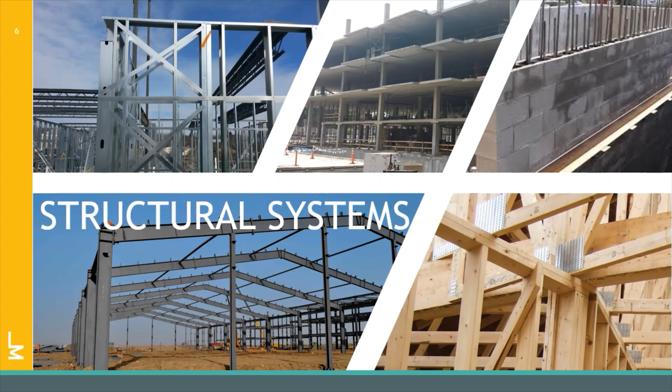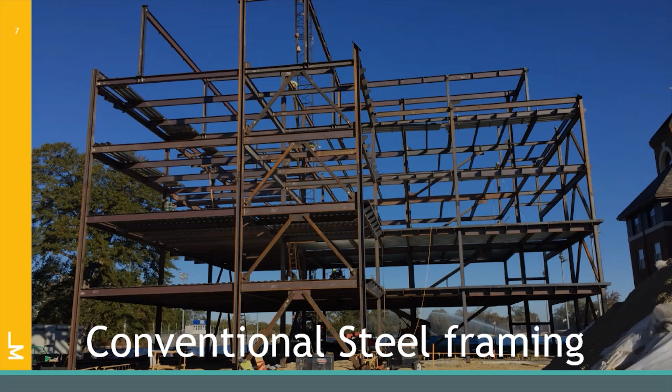We'll go through a couple here. The first construction type that we have here is conventional steel framing. This is definitely one of my favorites and one of the more common types of construction. A fun fact about steel is that it's the most recycled material on the planet, more than all other materials combined. Here we have a picture of what is called a pre-engineered metal building. It's pretty common for things like warehouses.

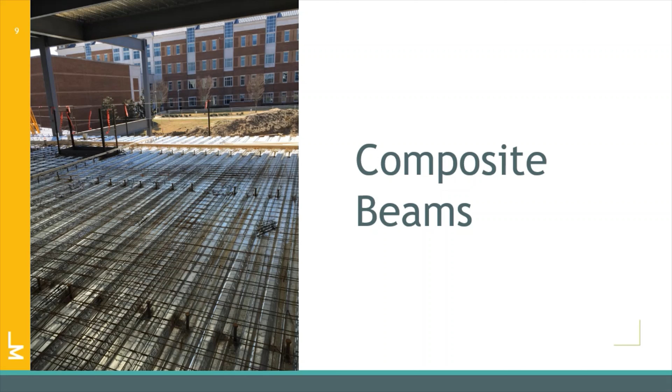Hey guys, I'm Brian, and this is Taylor. And we're with Lynch, Mykins Structural Engineers, and we want to talk to you guys a little bit tonight about what structural engineering is. So when we talk about structural engineering, we're talking about the forces in a building, right? And how do we, as designers, account for those forces? How do we create the building in such a way that that building can withstand all the forces safely and keep everybody inside safe while they're doing their thing?

So we have two types of forces that we work with primarily. One is gravity force, the other is lateral force. When we're talking about lateral force, we're talking about wind, tornadoes, earthquakes, anything that's going to make the building want to go side to side. One of the most important parts of the building, though, is the gravity load resisting system. That's the system that you can apply your body weight to, or furniture to, or any kind of loading in the building that's going to be supported directly by the framing members.

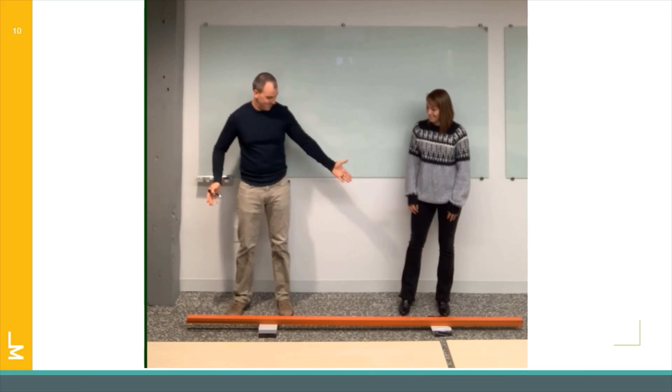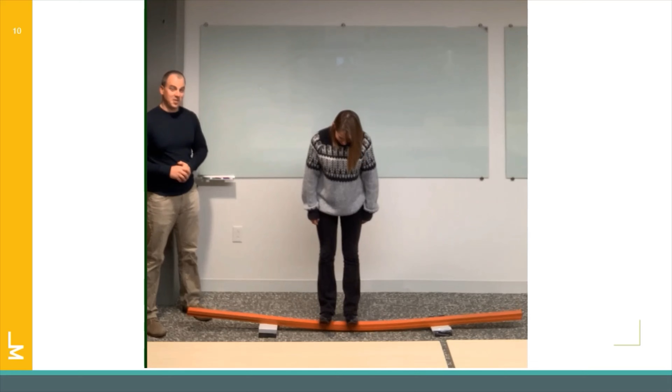So, to illustrate this tonight, we've got a beam on the floor, right? We look inside a building, most of the stuff inside a building can be reduced to beams. Whether you look at it to the left or the right, top or bottom, it's pretty much all behaving the same way. So Taylor is going to step on our beam. What do you guys see? You should see it sagging. You should see it bending like this, right? So what's going on in that beam?

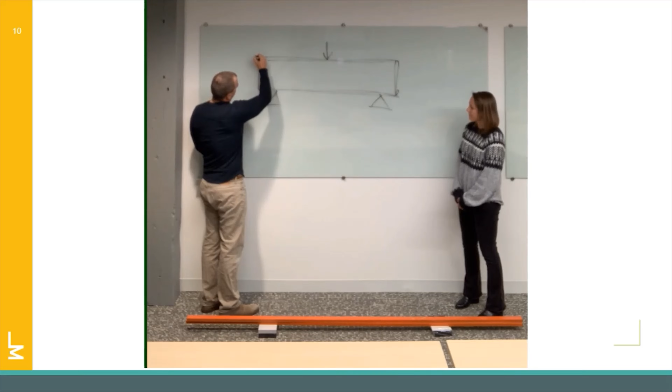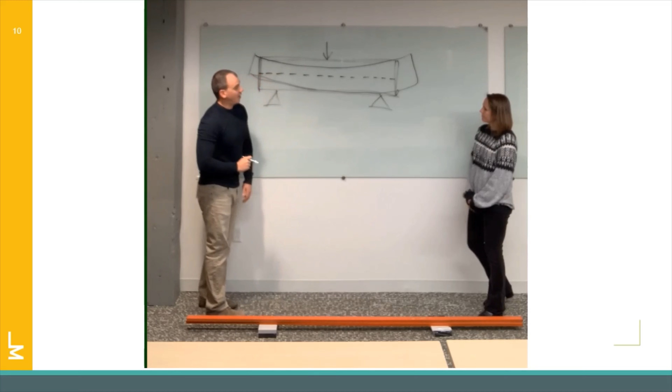We're going to draw it real quick here on the board so everybody can see. Here's our beam, right? Here are our supports. When Taylor stepped on it, she put a load right there in the middle of it, right? When she did that, the beam bent. It bent like this. Now, if I were to draw a line, a straight line, down the center of the original beam, that center line would be right here. When Taylor stood on that beam, that center line bent with the beam.

So the new center line is right here. Now, because of that, what do you think is going on in the bottom half of this beam? Are the fibers pushing against each other, or are they pulling away? The answer is they're pulling away. They want to do this.

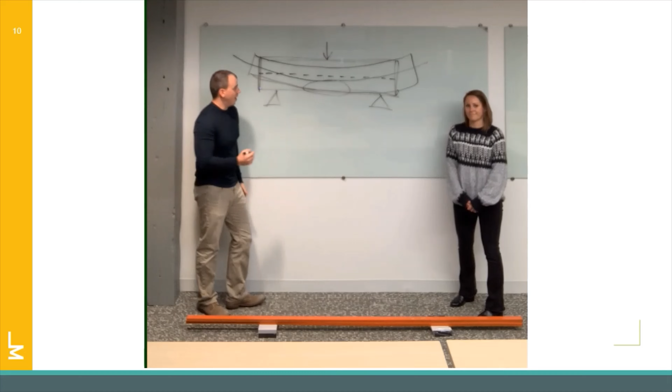That's called tension, the tension force. When you have two members pulling away from each other, that's a tension force. In this bent beam, we're creating tension in the bottom half, so we're going to put a big T right here for tension.

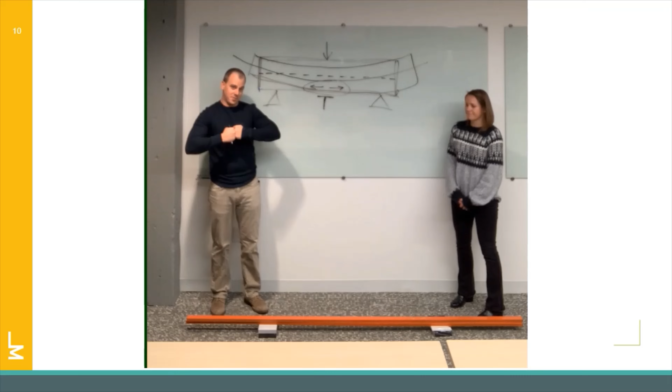At the top of the beam, are the fibers pulling away, or are they pushing against each other? The answer is they're pushing against each other. They want to press against each other. That's called compression. We'll put a big C up here for compression, and two arrows to show that's what's happening there.

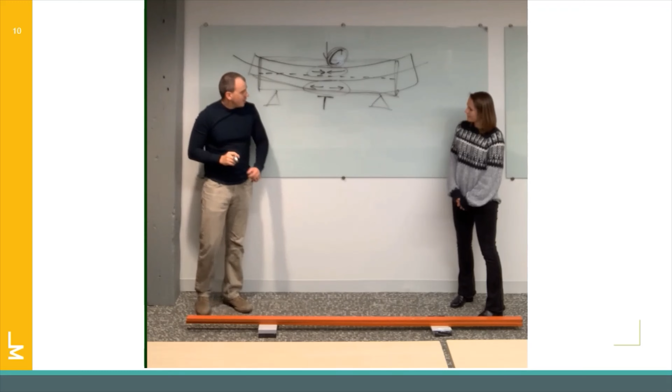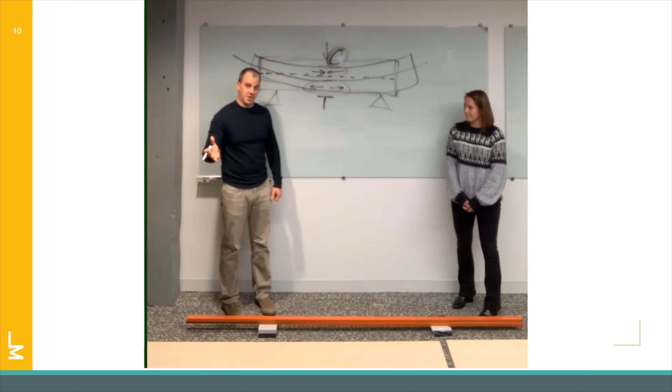In structural engineering, we have two primary materials that we most often use: steel and concrete. Steel is very good in tension, and concrete is very good in compression. But the best system of all utilizes both — we call this composite action. What we most often do is apply steel where the tension force is, because steel is better in tension, and concrete where the compression force is, because concrete is better in compression.

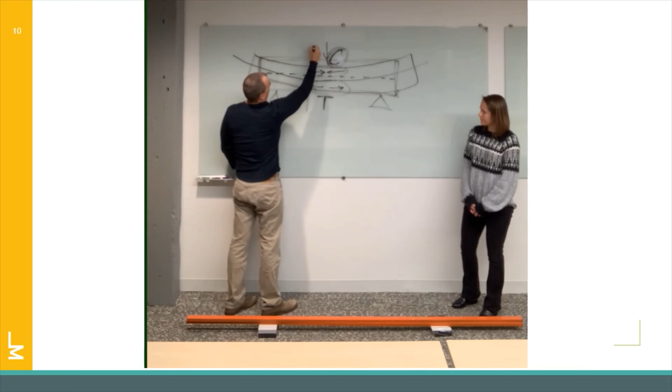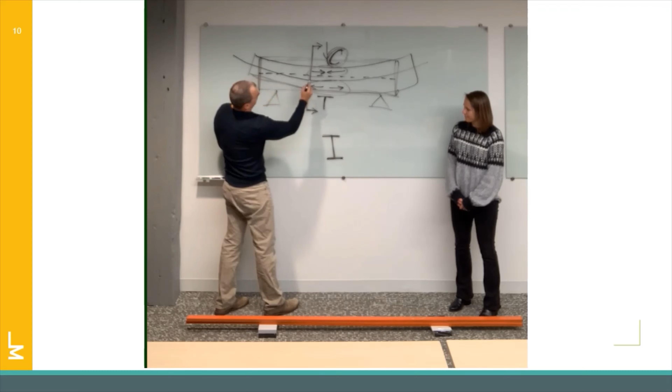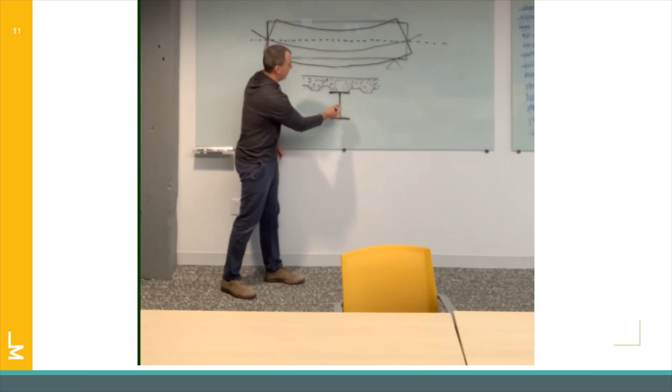So what you'll often see, if I was to draw a line here and cut this beam in half and look into it, I would see a piece of steel, an I-beam — we call them wide flanges. On top of the beam, where I have the compression force, I have a concrete slab. To recap: concrete slab up top, I-beam or wide flange beam below, and tying those two things together, a shear stud.

This way, the steel beam and concrete slab are gripped together as one unit. Again, compression up here in the concrete, tension down here in the steel, and the whole thing bends together when the loads are applied to the top of the beam.

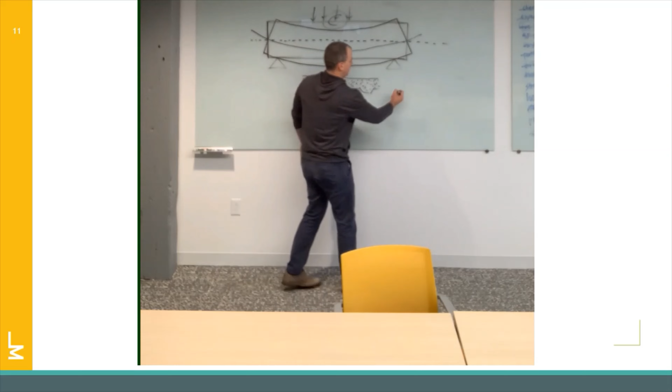There's also another primary type of configuration we see a lot in reinforced concrete buildings, where we actually put the steel in the concrete. So if this was a cross section of our beam, and the entire beam was concrete, we would put steel rebar reinforcing down here in the bottom.

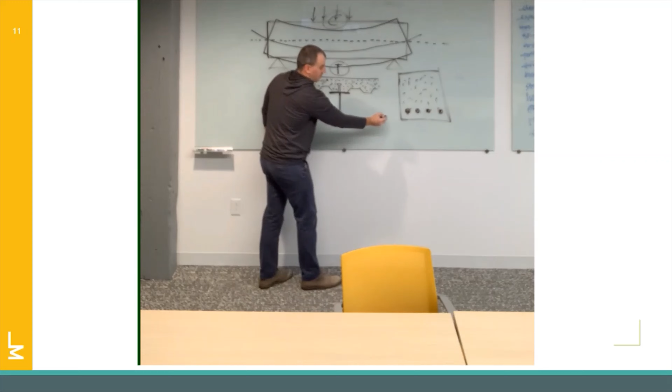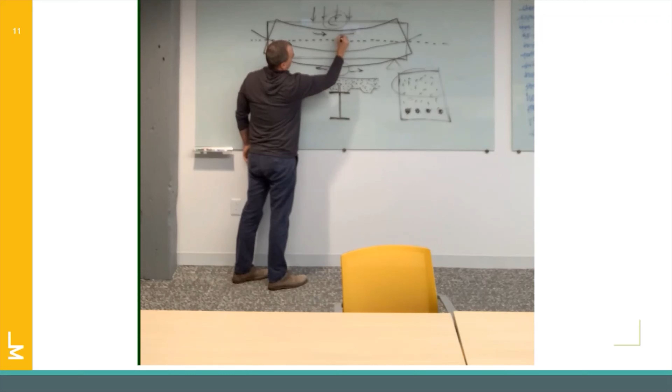Again, the steel, the primary tension element, goes down here where the fibers are pulling apart. Concrete goes up here in the primary compression region, where the fibers are pushing against each other. This way we make the most efficient use of both the concrete and the steel. And that's structural engineering in a nutshell.

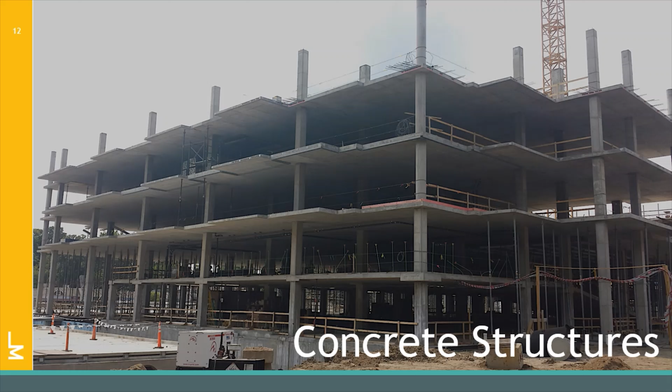Here we have our next structural system, concrete. Concrete's great for a couple of reasons: you can form it into a lot of different shapes, it's really good for floor vibrations, which we'll touch on in a second, and it also helps for fireproofing reasons. However, it is heavier than steel, so your foundations can get a little bit heavier and bigger.

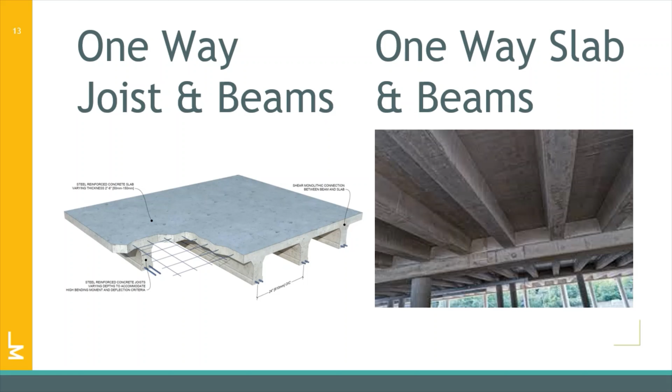Just like with steel, where steel has conventional steel framing, composite steel framing, and open web joist steel framing, concrete has lots of different options as well. We can form it into one-way joist and beam systems, one-way slab and beam systems. Depending on the loading criteria and the column spacing, this can be an efficient option. Another structural concrete option is a flat slab, typically used when the columns are spaced a little bit closer together.

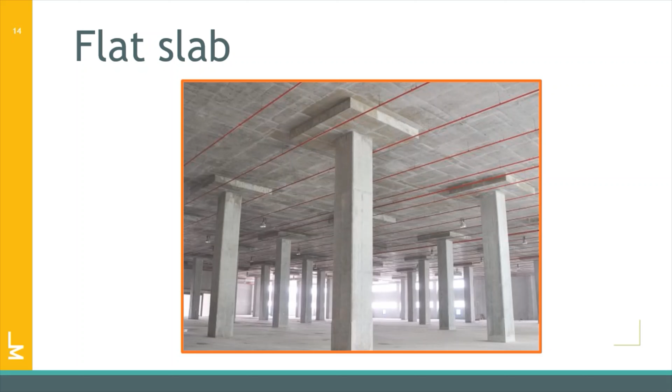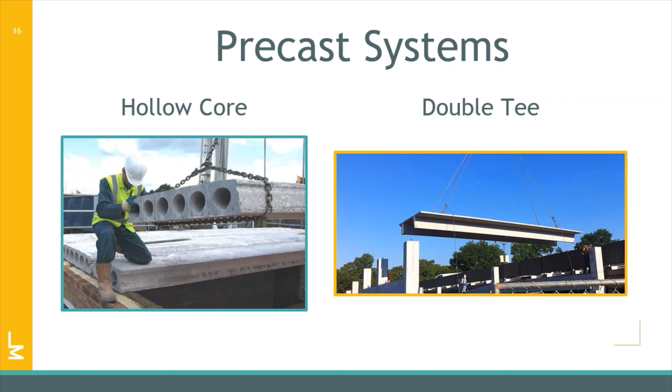Another concrete option is a two-way waffle slab. These are more commonly seen in older structures, so you may have seen these before. The previous concrete options mentioned are known as cast-in-place concrete, where the concrete is poured on the job site itself. There are other options where the concrete is poured before it gets out to site, known as a precast system. This tends to be a little bit quicker.

Another construction material we have to choose from is wood. I can guarantee you that most of your houses are made out of this material. Typically, it's used in smaller buildings because of its ease of construction and ease of finding the material itself. It can be used for other small structures such as park buildings. More commonly, it's being used for architectural features and even in larger construction as mass timber.

Another construction type is masonry.

Masonry is actually referred to as concrete masonry units. It's made out of concrete, but it's modular, so it goes up pretty quickly. A lot of your schools are made out of masonry, and you can look around the walls in your schools and see those blocks.

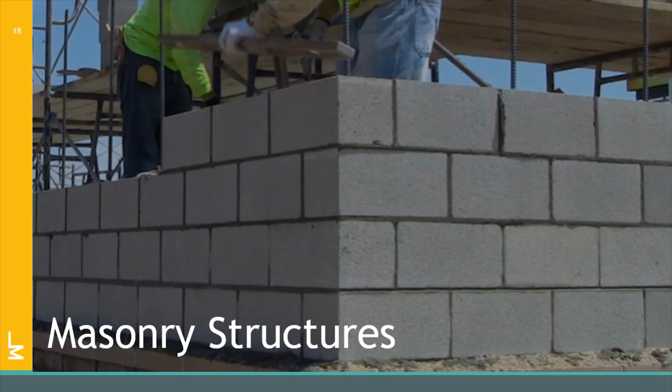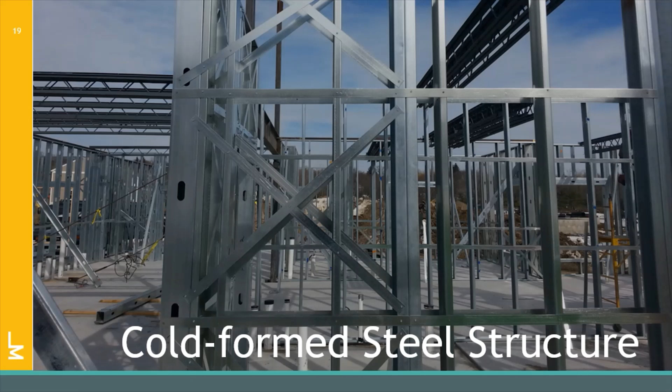Finally, we have cold-formed steel structure. This is different from the steel structure discussed earlier because it's known as light gauge. It's a lot lighter and less strong than the hot-rolled steel we talked about earlier. It's used in most conventional steel buildings as wall studs, so in your house where you have wood stud walls, in a commercial building you would have cold-formed steel walls. However, this material can also be used as the load-bearing wall system in a conventional steel building.

The first consideration is building occupancy. Is this building going to be used for a hospital, a school, or an office? These things can help determine our structural system. Depending on what our building occupancy is determines what loading criteria we have to use for our structure. That can be found in the codes we reference. Our most common codes are ASCE 7-10, the International Building Code, and the North Carolina Building Code.

Another consideration we look at is the site. What type of soils are located on the site? Are the soils good or bad? With the help of a geotechnical engineer, we can determine our foundation loading requirements. Secondly, we look at where the site is located geographically. Is it located somewhere like Florida with high hurricane winds, or somewhere like California with lots of earthquakes and seismic activity? Both wind and seismic play into our lateral load resisting system.

There are lots of serviceability requirements, but we'll touch on vibrations and deflections. Have you ever been in a building with a long hallway, run down it, and felt the floor shake? That's an example of vibrations. We design our buildings to a level of vibrations so that people feel comfortable inside. For example, you don't want to locate a gym right beside a study room, because then the floor vibrations will affect people trying to study. You also don't want to design beams to loose deflection criteria, because then you might get cracks in your brick or your windows might look deformed.

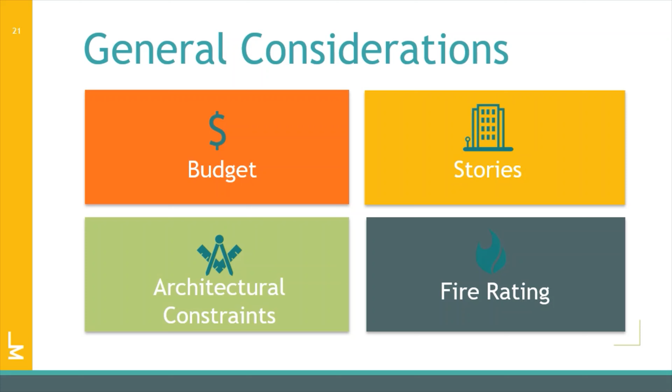And fire rating. Fire rating is determined by a number of things, but one of those can be the thickness of the structure. We have to work with the architect to make sure all of their requirements for fire ratings are being met with our slab thickness or structure thickness.

Structural strength and serviceability: strength is something required by the code, whereas serviceability is something we just have to think about as structural engineers and problem solve. How is our structure going to impact the future user or the owner? As mentioned before, vibrations play a big part of that.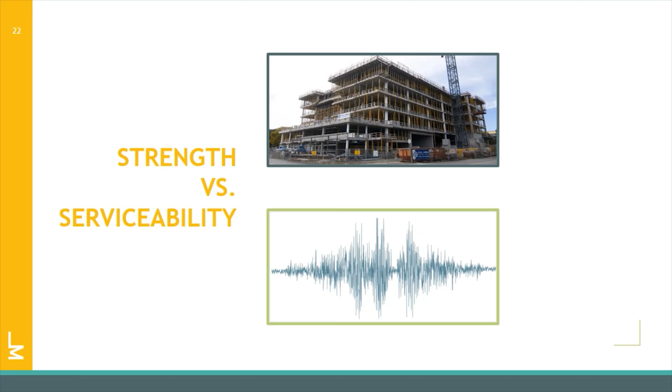Now that we've given you a big overview of structural engineering and what structural engineers do, how does all of that fit into the big AEC industry? You've seen lessons already on architecture, civil engineering, landscape architecture, and the list goes on. But where do structural engineers play into this? Typically, structural engineers work on a team with mechanical, electrical, and plumbing engineers, and civil engineers, underneath an architect. The architect works with the owner. Depending on the size of the project, there may be other consultants involved, such as lighting, roofing, or even safety.

Like a structural engineer, they work under the architect, and the architect works for the owner. Architects and their teammates work for the owner on the design side of the project, where contractors and their subcontractors work on the construction side for the owner.

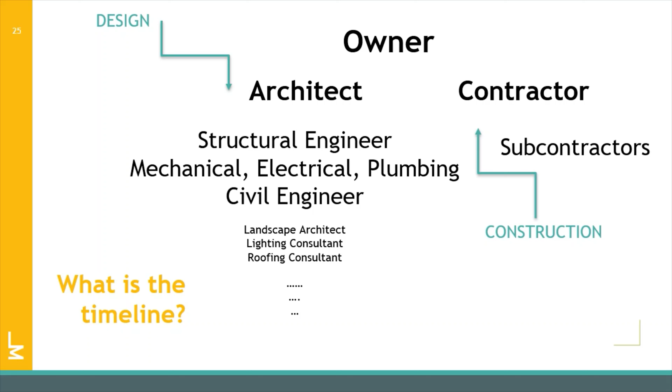Again, this is for a typical project. As a structural engineer, we work with the architect through all of the phases, starting with schematic design all the way through construction administration. In schematic design, we're doing a lot of concept-only drawings. Then we progress into design development, where we start to add a couple more details and really get the design ideas fleshed out.

Construction documents are the signed and sealed versions that we send to the contractor to build the drawings themselves. The construction administration phase is where we help answer any questions the contractor may have about our drawings. The key to making any project go smoothly is open communication throughout the entire project, whether that's us communicating with the architect, the other consultants, or the contractor, and sometimes even the owner themselves.

What does the AEC industry create together? Our projects can be as large as an outlet mall, or they can be as small as a shelf. As a structural engineer in the AEC industry, we get to touch on a lot of really cool projects, from hospitals to schools, or even weird projects like zoo exhibits. There's never a dull moment. Every day is different, and we're constantly using our brains to solve really complex and cool problems.

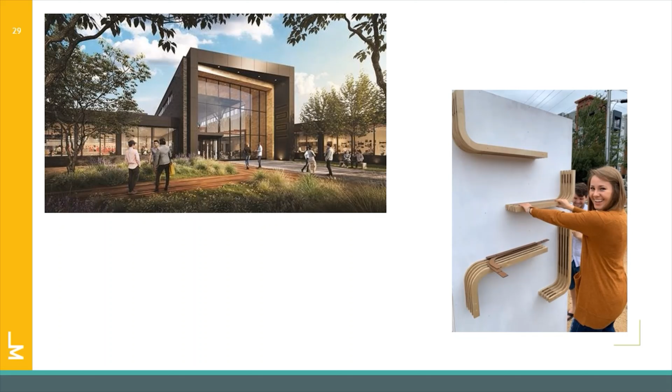What we're going to do today is we're going to talk through how the tiny house is framed. We're going to try to show you guys why it's framed the way that it is.

So we're going to start with the roof. Generally, when we're laying out a building, we start at the top because that's where the load first gets applied. The load is then going to travel down through the building all the way to the foundation. But we're going to start up here.

So when you think about the roof of a house, think about the load types that would be on that roof. You'll have the self-weight of the roof, but you'll also have things like snow in the wintertime, or perhaps the loads of you and I if we go up there to put a new roof on the house, or if some construction workers go up to put a new roof on the house. You'll also probably have things like pipes and insulation and ceiling fans maybe hanging from the roof itself. So we'll have a variety of dead loads during the lifespan of the building.

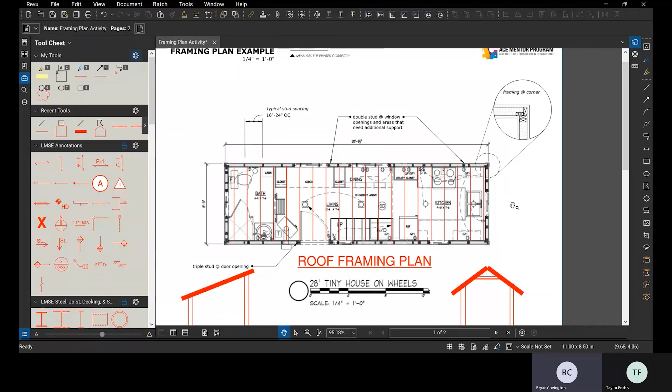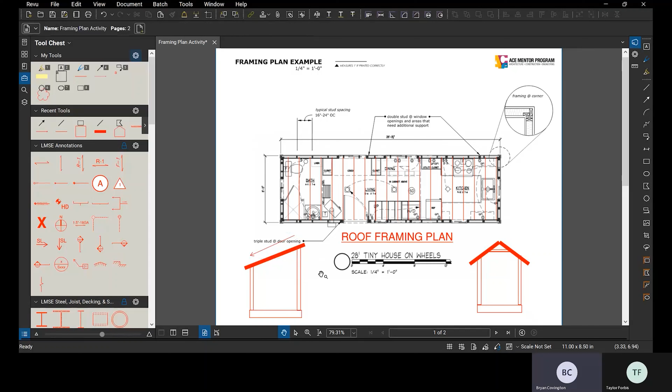We've drawn 2 cross sections here below. The cross section on the left is what's called a shed roof. In this type of roof, you only have one slope. You can see the high side and the low side. The water, when it rains, drains down, by gravity, to the low side and pours off. Now, the other typical type of roof is called a gable, and over here on the right, you see the typical gable framing.

In this scenario, you have a high point in the middle, called the ridge, and then rafters on either side sloping down away from the ridge, so that when water falls on this, it drains off at each side evenly. What we've drawn in our roof framing plan is an example of a shed roof, because we only have one line of rafters.

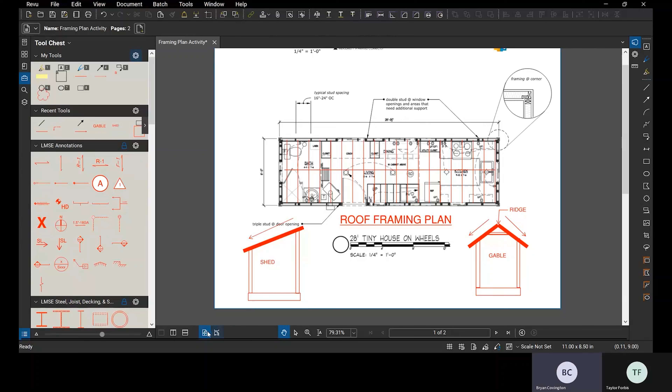In your activity, you can choose which one you'd like to draw. If you were to draw a gable end roof, you would have a ridge board running right down the middle, just like that. Okay, so next we're going to talk about the wall framing of the house.

You have in these 2 cross sections that we've drawn, studs on either side, and in actuality, studs are on all 4 sides of the house. These studs have to be able to do 2 things: carry the weight of the roof down to the floor, and also resist wind pressure against the side of the house. These 2 things combine to determine the maximum spacing that the studs can be.

When we talk about stud design, we're talking about compression generally on one face and tension on the other face, so it really resolves itself to beam action, similar to how we talked about in our video. Once we've determined the spacing of the studs, which is typically 16 inches on center, we can then determine what type of wall sheathing we want to use. Usually about a 1/2 inch thick plywood is typical for your sheathing on your exterior walls.

You're probably wondering to yourself, what about the holes in my walls? What about my windows and my doors? Well, this is an interesting scenario because we have weight coming down from the roof above, and we need to spread that weight out into the studs at each side in order to make room for our door. When we do this, we use what's called a header. A header is basically a small beam that runs across the opening of the door, spanning between stud packs at each end.

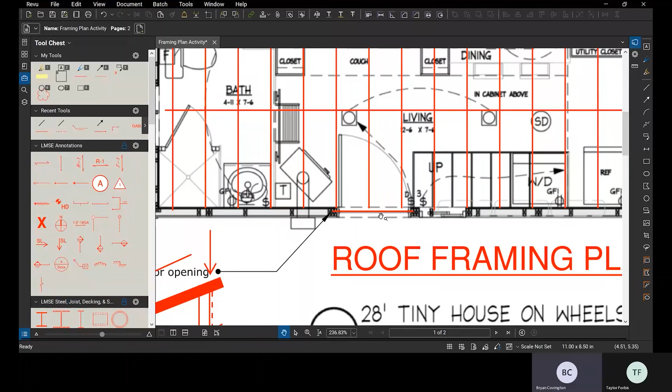This beam is sized for the total weight of all the rafters that land on it. In this picture here, we would size this beam for the weight of 2 rafters bearing on it, and then we would size our stud packs at each end for the number of studs required to carry that weight down to the floor below. In your activity, it's not necessary to determine how many studs—you can just put a pack there.

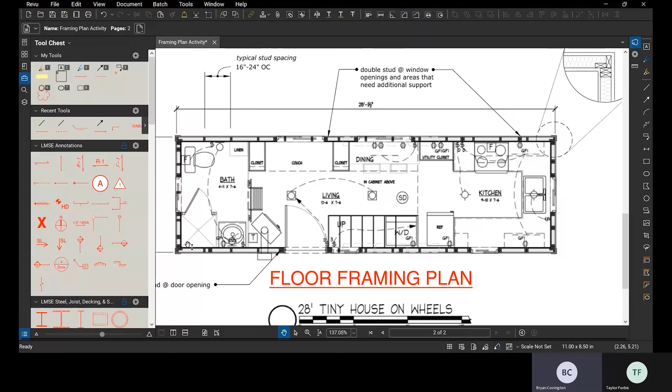Okay, so after this, we're going to move on down to the floor. Now again, it's similar to the roof in that each floor joist has to carry the load that's applied to it. So what are loads for your floor going to be? They're going to be you and me walking around, furniture, refrigerators, TVs, right? You could have dead loads from carpets and from floor finishes. There could be all kinds of things that would create load on your floor.

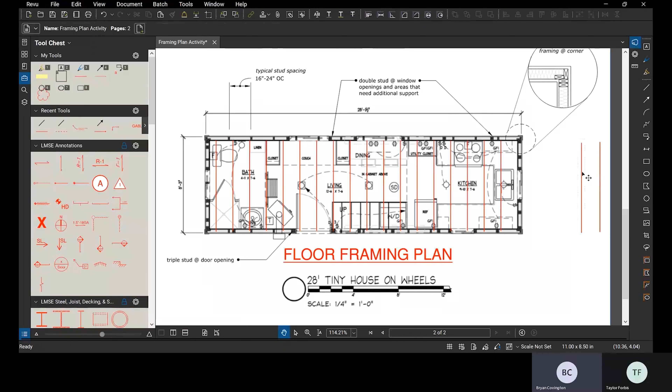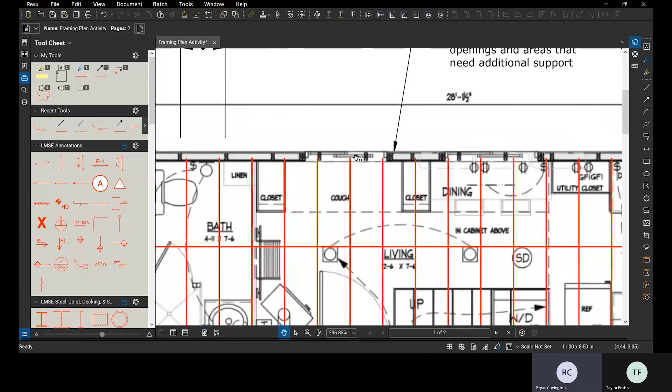So what we'd like for you guys to do is take a minute to work through your tiny house and lay out the framing of how it would go. Be sure that you catch each of your windows and doors and make sure that you put headers over each one of those. These are going to be typically double 2x10s or double 2x8s.

One unique thing about your tiny house is that you have the option to put a loft level inside. If you were to put your loft over your kitchen, you would need to design a floor system for that. So again, your floor joists of that floor would span from exterior wall to exterior wall and be sized to carry the load of whatever would be in that loft.

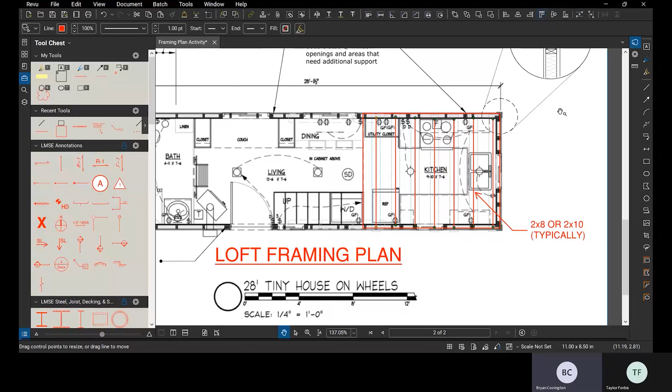Bedroom load is a little bit lower than typical floor design load, so maybe you could get away with using 2x6s for this. Your typical wall studs are going to be 2x4s, and the roof rafters for this could be 2x6s. So have some fun—jump in there, draw some stuff, sketch a little bit, think about the ways that your tiny house would be framed. Hope you guys enjoy.